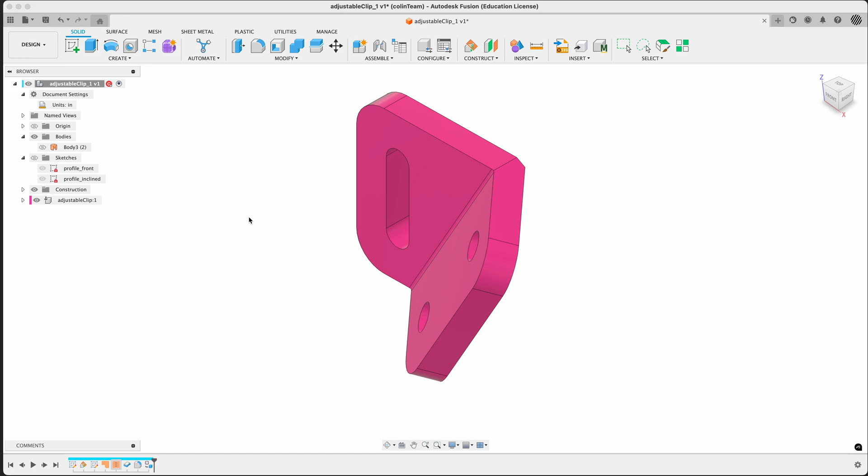So we're going to place some fasteners here. We get a new color, it's kind of a nice fuchsia - it's fine, whatever color you have. If you shift N, you can see what just the steel, standard steel appearance looks like, but for us, color's nice. Notice what it does down in the history - it gives us a new feature, that's quite big. Body to component, obviously.

From here, I'm going to do a couple of things. One, we're going to place some fasteners. Two, we're going to run a mesh, and that'll be the end of our video. Let's do the fasteners first.

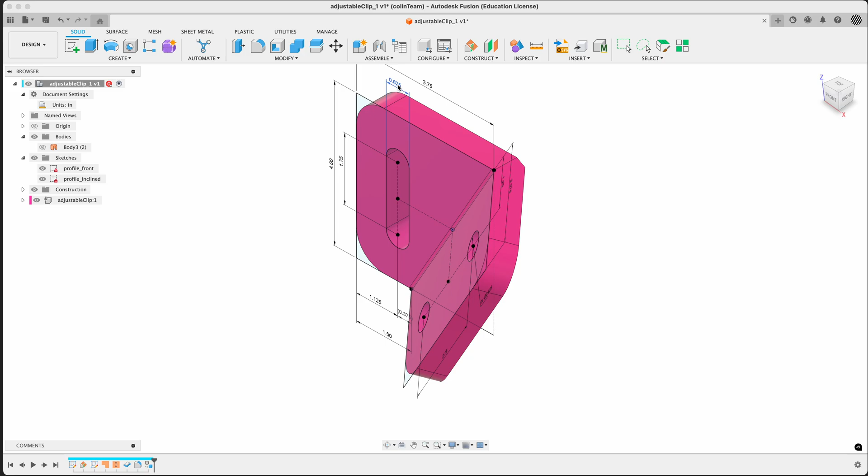We know the answer to this. If we want, we can have a look at the sketch. These holes are driven by this slot in the previous video, 0.625, better known as 5/8. Again, if we want to look at our driving sketch, 5/8, 2 holes.

So that's all fine. Sorry, I'm just going to turn myself to do not disturb - I can hear the phone going.

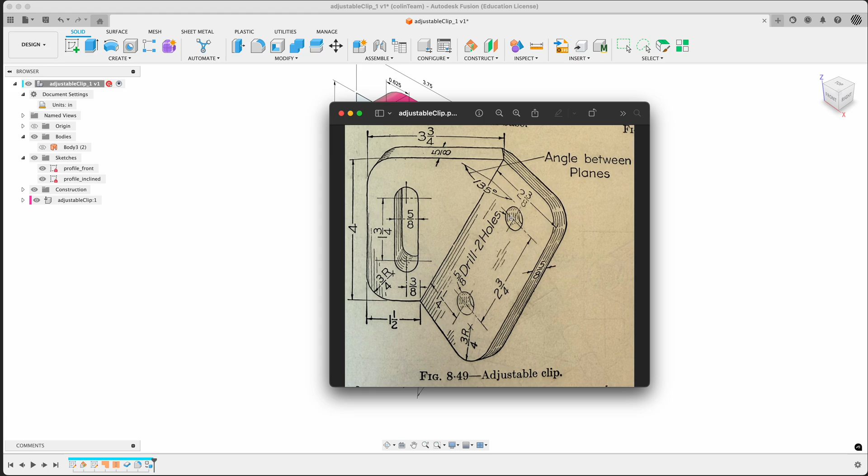So the goal here is to put some fasteners in here. How can we do that? There's two main approaches to this. One is to use McMaster-Carr.

They basically provide a bunch of geometry that matches stuff they can sell to us. The advantage of using McMaster-Carr is that when we place something, we can also get a parts list and actually just get a shopping cart out of it and off we go - it'll be delivered, nice. The disadvantage is they are kind of independent and they're nicely modeled, but they're modeled for appearance mostly, which is great if you're doing renderings and all the rest. But if you want to just run simulations and all the rest, it adds a bunch of geometry we maybe don't need.

The other option for us is to add a fastener - this is part of Fusion. Insert fasteners is a complicated thing, it's newish, but it's surprisingly competent. It's also standards based, so keep that in mind. We're going to do both here, so you get a pass at both.

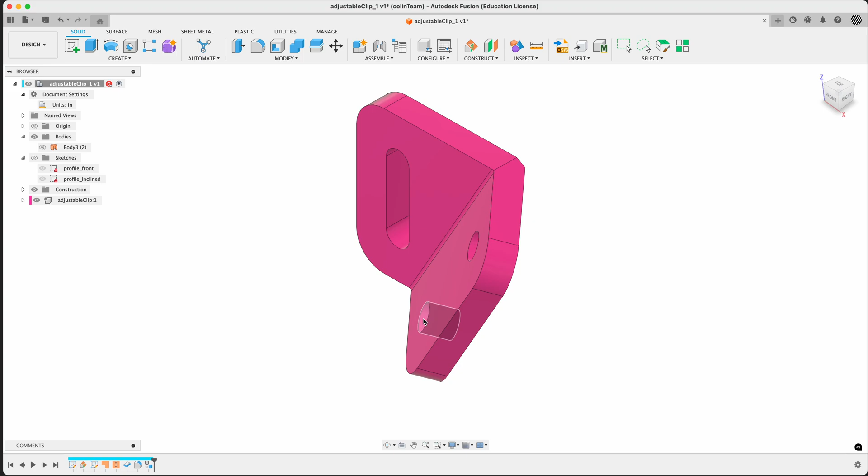Let's put McMaster-Carr into the first hole, and we'll put the fastener from internal fastener into the second hole. Easy - first step, let's try McMaster.

Sorry, if you can't find it, it's under Insert, McMaster-Carr. You get this little, essentially just a web page. You can kind of move it around in the background, but you can't really, for example, do any measuring. So you have to know what you're after, 5/8, and this is 5/8 thick. We're going to put in a washer and a socket head. That's the plan anyway, let's see how that goes.

The washer is the key - the washer goes in first. But because of the way McMaster-Carr works, it just inserts a component. We don't necessarily need to place it in order. The inbuilt fastener stack, in a way, does have to go in order. In a way, it's easier anyway.

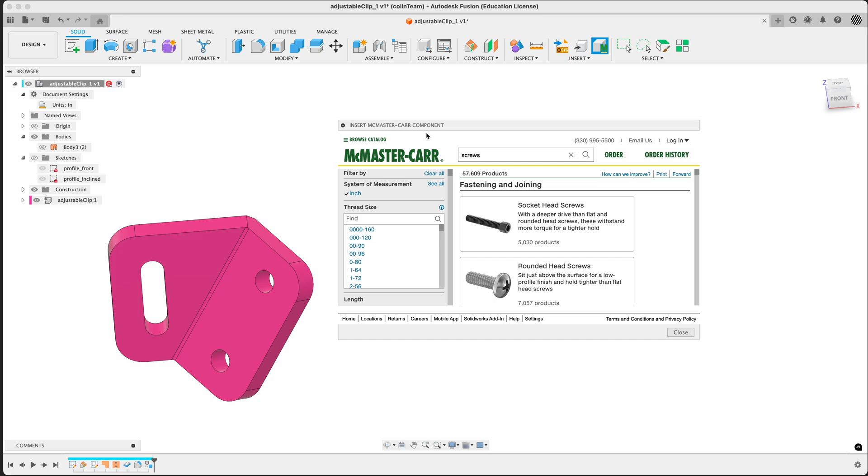Let's put a washer in first - or let's put in the fastener first. Let's do the fastener. I want an inch apart, you can make this a little bigger. I want a socket head.

Now, there's a lot of them. Let's start by trying to filter this a bit. 5/8 is the size we're after. Somewhere in there - no, 5/8 11, 5/8 18.

No, that's a coarse thread - that's the thread essentially, so an inch, it's threads per inch. Or, yeah, let's say threads per inch, and 5/8 18. Let's go for 18.

This is quite a rough part, but we don't know what it's attaching to, so it might be just purposefully flexible for size. Let's go for 5/8 18.

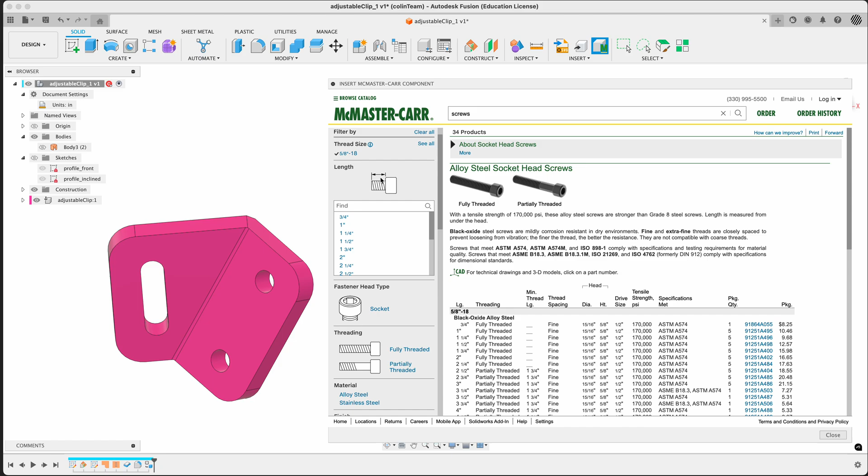This will define everything, more or less everything we do from here. Length - the plate is 5/8 thick, 2 times 5/8, well what's that? 5 divided by 4, all right, 1.25, so that's better known as 1 1/4. So let's make it twice the thickness of the plate. Notice the length is under the head.

Got alloy steel, stainless, that's about it already. It's good. We see the right things here. It's black oxide alloy steel, keep that in mind, and it's 5 for $10 US.

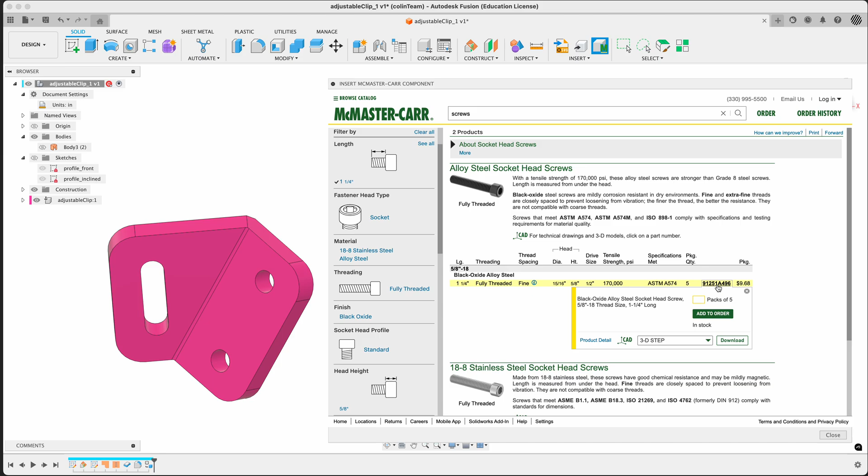Let's have a look. We can see the product detail if you want, that's what it looks like. And I don't want CAD 3D SolidWorks, I want 3D Step. Let's go for threads to make a point. There's a lot of information here, including its strength, its hardness, and specs.

It's from the US, and then a little bit of discussion about it. They're mildly corrosion resistant. So this would be the finer threads are stronger. They're also become a little bit vibration resistant. It meets a whole bunch of standards.

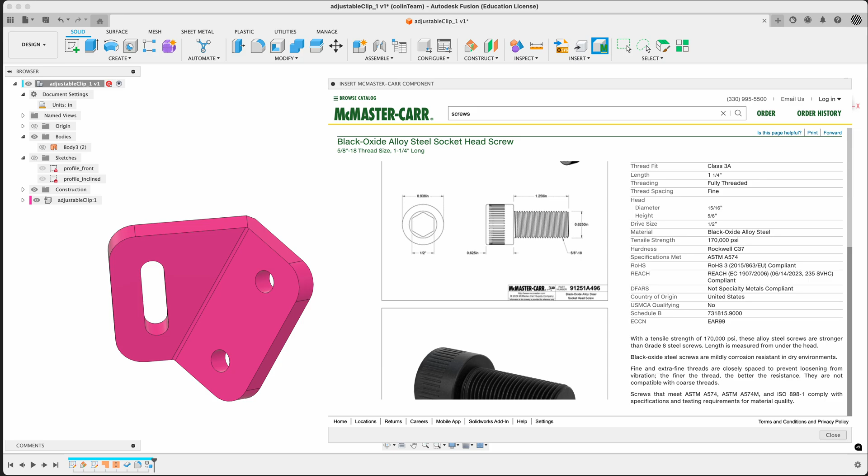So if we wanted, we could, for example, take a screenshot of this, and we could keep an eye on that if we can kind of maybe use it somewhere. So there's our screenshot. So nonetheless, let's download that. This is, we don't have to use the screw to drive all our decisions from here on, but it does help. So as soon as we download this,

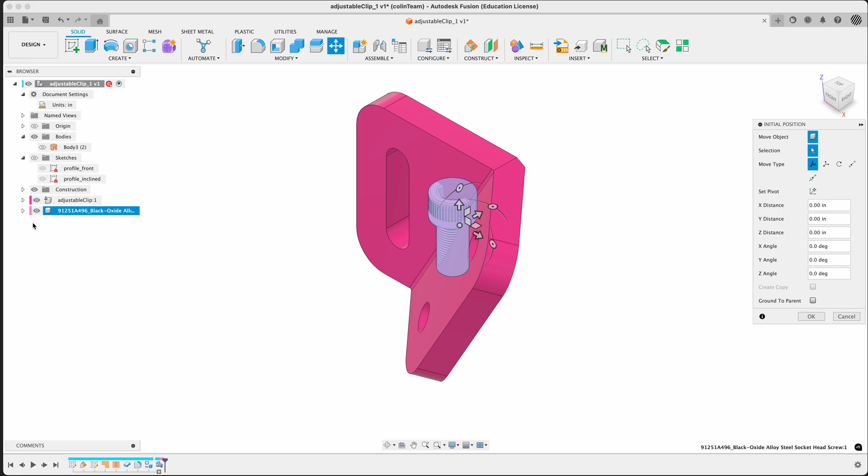basically just plugs it into the file. There it is. Notice there's no lock here, so this is loose. And we'll just leave it where it is right now. It's nice pink. What's the diameter of this?

Let's try a check here. The diameter is just under an inch. So we need a washer that's at least an inch.

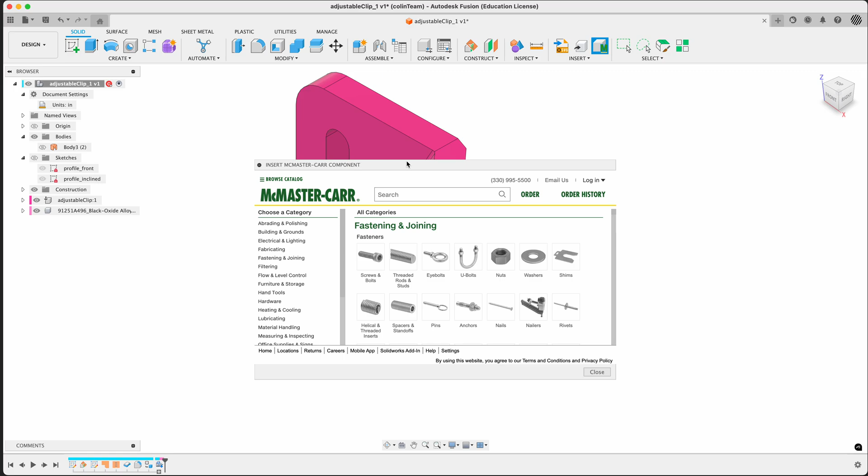Perfect. Let's do McMaster again. So this can be a little tedious because you have to go in and out a lot. Washer. And you do have to keep track of sizes and all the rest. Inch. Screw size is probably what we're after. So the interior hole is driven by just 5/8 this time.

Washers, there's a whole bunch here. Let's just go for washers. General purpose. There's a lot of other things. We had, what did we have? An ASTM.

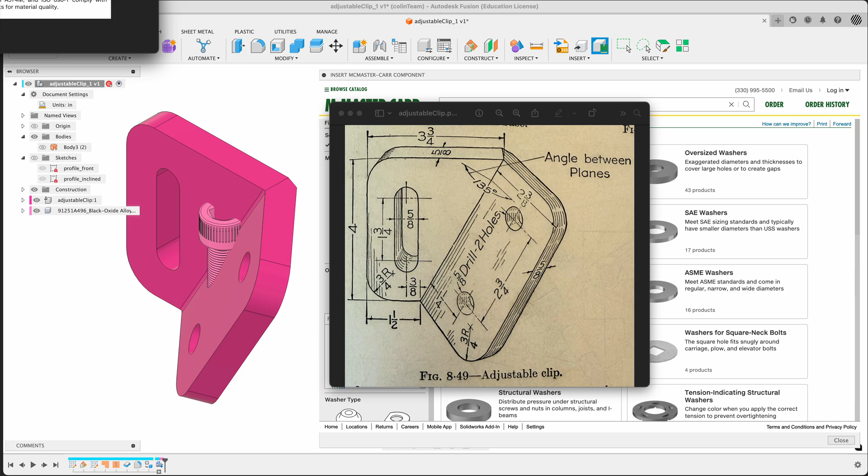Come back here, we had an ASTM standard. Let's see if we can see that here. So this is ASME. General purpose, surely that's not so bad. Let's go for that. Stainless, are you crazy? No, steel, and black oxide, that's what we want.

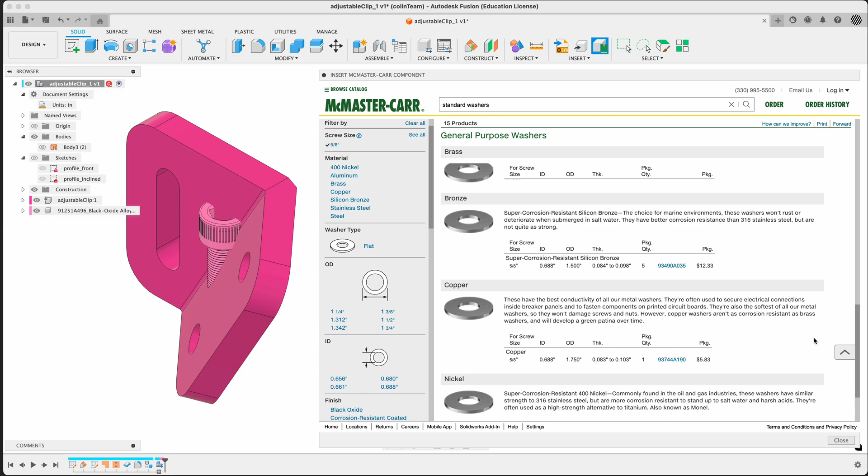And there's one right there. Outside diameter, looks like 1 3/8. 10 for $7. The rest is, no, it's probably what we want. Let's go for this guy. Have a look, product detail.

It's got the same coating which you would like from the fastener, so it's black oxide or parkerized, however you want to see it. It's also American. Standards, where are we here? Well, isn't much. They're saying this is our go-to, so why not?

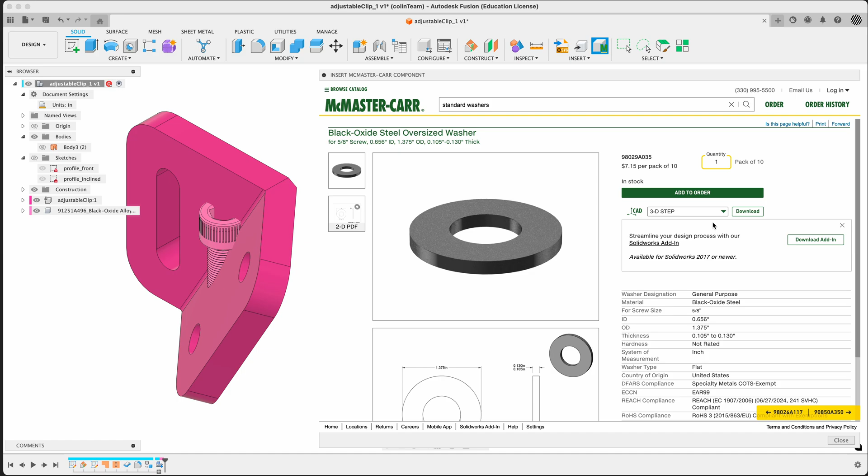It looks about the right size. Let's just download it and see how it goes. Looks okay, now it's obviously not in the right spot.

How do we stick it into place? So normally we're going to be using a joint, the shortcut for that is J. If you want to see it under assembly, joint, J, because these are not as built. We'll come to that later.

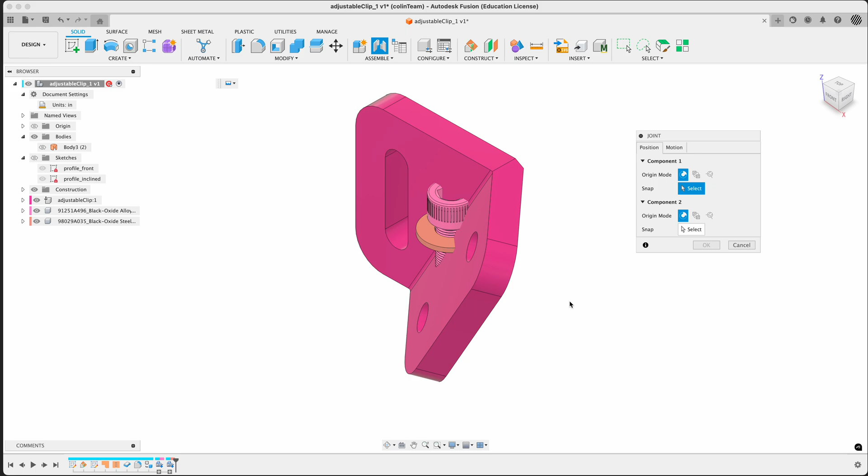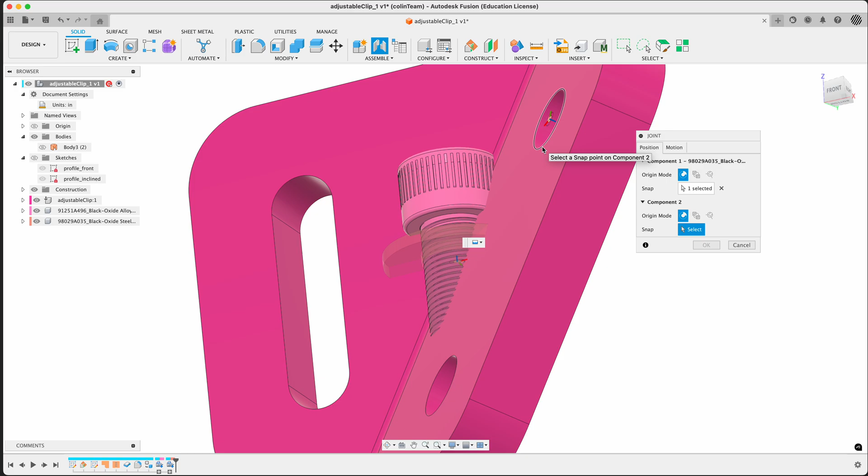So there's an order here, and this is very particular. You pick the uncontrolled, unconstrained parts first. So our adjustable clip is constrained to the universe, it's modeled thus. So now we want to pick our washer first. Now, it doesn't have to be the inside circumference of that hole, but this surface, we can pick anything. It's easy to grab the outside, and therefore easy to grab the outside of this hole in the constrained part, the clip.

If we pick it right, it should just swing on by. Now, type of motion do we want? Rigid? Let's get a preview. Oh, nice. How about revolute? Can't see anything happening, but it is turning. How about something else? Pin slot? There's all sorts of stuff, but is this washer going to move? No, rigid. Okay, do it again.

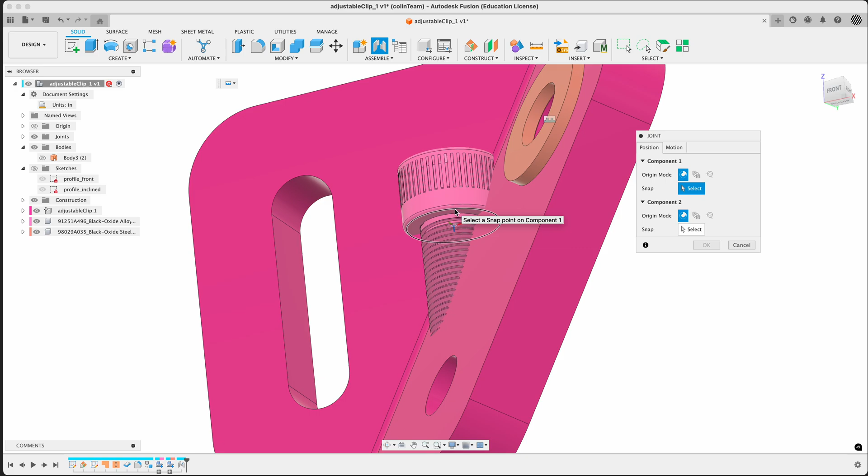Right click, repeat joint. I want this socket head right up against this washer now. This is unconstrained. And I can attach it to either the inside or the outside, the outside's easier to get. Ghost everything out to show us what we're doing. And again, this could be revolute and all the rest, but when you're done, when you pull away the Allen key, it is rigid. So let's just say okay to that.

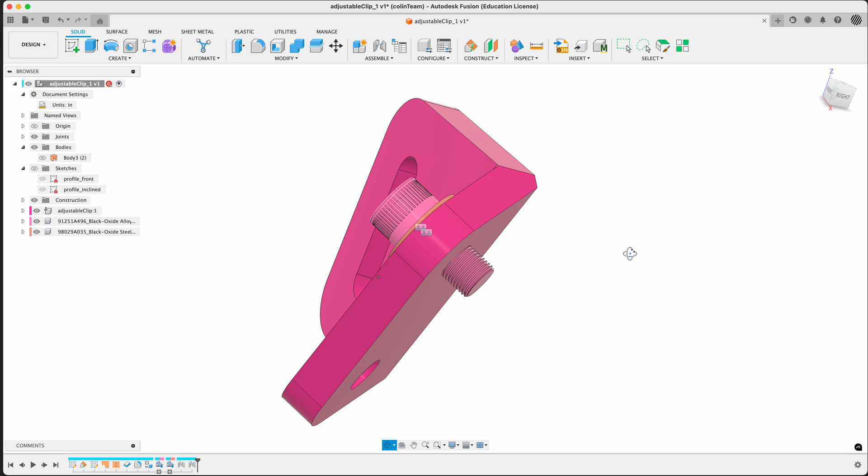Nice, there we go, placed fastener. With standards, like so, there's a standard fit and all the rest. So not bad, let's just leave it at that. We can get into lots and lots of details about fasteners, let's just assume it's okay.

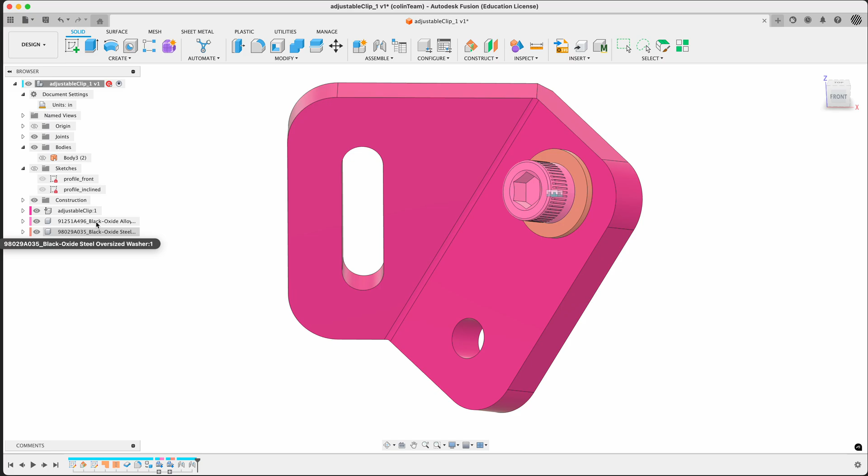For now, because what we want to do is get to the other side. We want to use the other approach inside of Fusion, which is to place by the fastener feature. Now, notice what we've got here, we've got three components now, all within our adjustable clip assembly. It suddenly turned into an assembly. So next, search fastener, or sorry, shortcut fastener, insert fastener.

You get quite a large window. Depends what you did before. So basically, the first thing you check for is standards. I'm after imperial or metric, you can also clear it and get both. We're in an imperial part here. ASME is turned on, you can also ask for ANSI.

But what was our thing before? Let's have a look, ASTM and ISO. That was for the fastener. So we don't have ASTM, but we've got ASME, let's go with that for now.

Just get it up, fasteners, there's other things to place. But what we're really after here is the same order, so let's do washers. You only have to click once, not a double, once. Plain. Now, based on our filters, we've got Imperial and ASME, we only have one choice. Nice, that always makes us happy. And we can see the standard we're going to conform to, B18 22.1 1998.

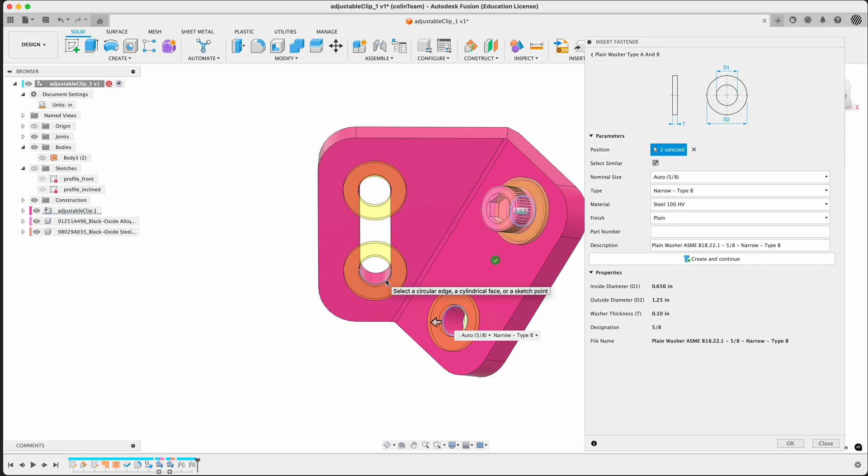Click it once. Can keep placing. Oh, nice. Whoa, look what it does - it looks for all sorts of curves and starts sticking them in. That's not quite what we want, so I don't want lots here. It's hidden, it's adding another one underneath here.

So let's reselect. Notice we've got some options already. Select once. Now I've clicked once, you can see this green check to say finish here. But now if I do it again, it doesn't populate all of them. Now we've got some choices here, and we can see some outside diameters.

We were, I think, 1 3/8 for the other washer. Maybe that's a type A. It's close, close - right, 1.3. But narrow type B, smaller. Narrow regular B, ooh, that's quite big. Wide A, it's thick. Wide B, a monster.

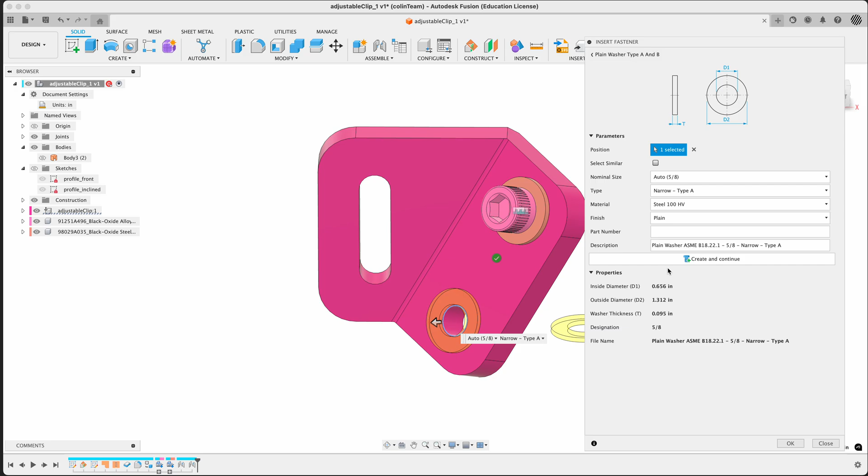So it looks like we're narrow to match what we got from McMaster, and it looks like type B. The diameter is 1 1/4, type A - that's closer to what we've got. So let's go with type A, 0.095 thick. Can't really change that, that's controlled by the standard. Once we're happy with that, let's go for a narrow type A. I'm gonna take a screenshot of this so we don't forget.

We can go ahead and create and continue, which is kind of great. So we're keeping this open, and we're just going to go with create and continue. Makes the washer for us, creates a new part for us as well, inside of fasteners - we'll look at this later.

So just working along, so I want to go back and now do the fastener. So go back, go back - alright, you can always go back in here as well. Bolts and screws. Socket heads - they look a little unsockety, but that's it right there. So it's not countersink for any of these, it's socket head.

Don't want shoulder. Now we're still in ASME Imperial - this is good, right? We want the same standard for the washer and the fastener. It's a hex socket cap screw, ASME B18-3 2000. Now this is similar to the same class of standard, so let's go with that. It's not a spline, it's a hex.

Get a little view of what we're looking at. You can open up the properties - there's a lot more here because there's a lot more geometry.

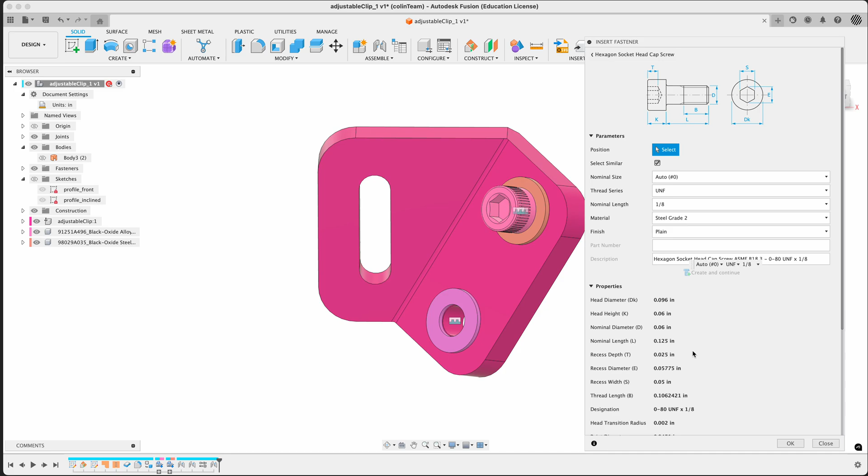Now the problem we have is that our fastener is going to want to sit on top of that washer - how do we size it? Notice our little tiny fastener, that's not the right size. So if we hover over the core of the hole, it thinks, oh, 5/8. But where is it? Now our next hover is on the surface of the washer - we have to click once for that. So notice it's in the right spot.

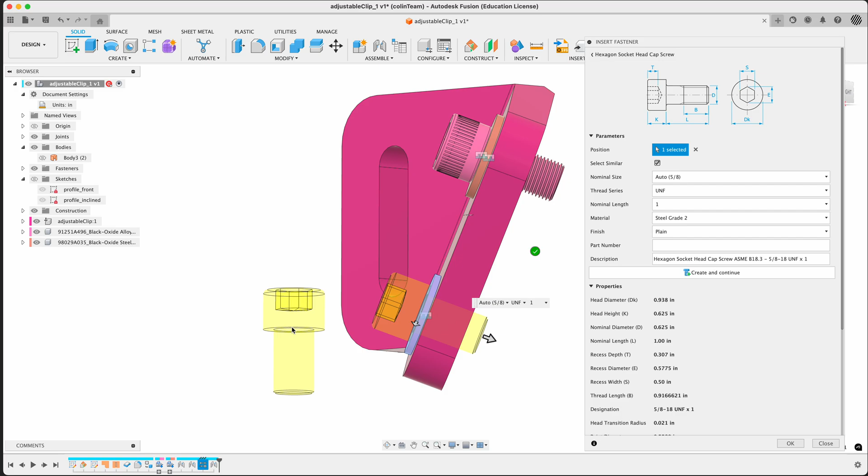What can we change here? Ignore the preview for the next placement. And we can start pulling, and it gives us standard lengths. Notice it's updating to the right there.

So you can either line it up by eye, because we want that 5/8 times 2, better known as 1 1/4, or you can kind of drag and have a look. We're getting a little thing over here. You can see it's also updating our length in the designation - this is kind of great. We can also do these little drop downs here.

Coarse - notice it changing shape. We did a fine on the previous one, so we're not allowed 11. So this is our designation here - we're at a fine, you see an 18. Nice, 1 1/4 long - auto is caused by the size.

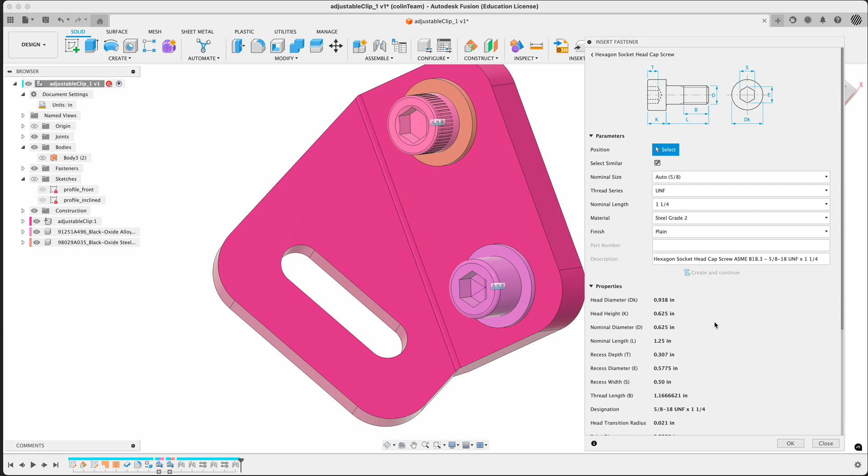Once we're happy, you can either say create and continue if you want to do more stuff, like place more - you can place a whole bunch of fasteners here, different sizes and all the rest. But for us, we can say OK, or create and continue. I find this a little more pleasant - I make sure it's right, and then I say OK.

Oh no, I don't. Now I've screwed up.

So this guy, when I said OK, I made one wherever my cursor was hanging out. We can undo that if we want, so let's do that again.

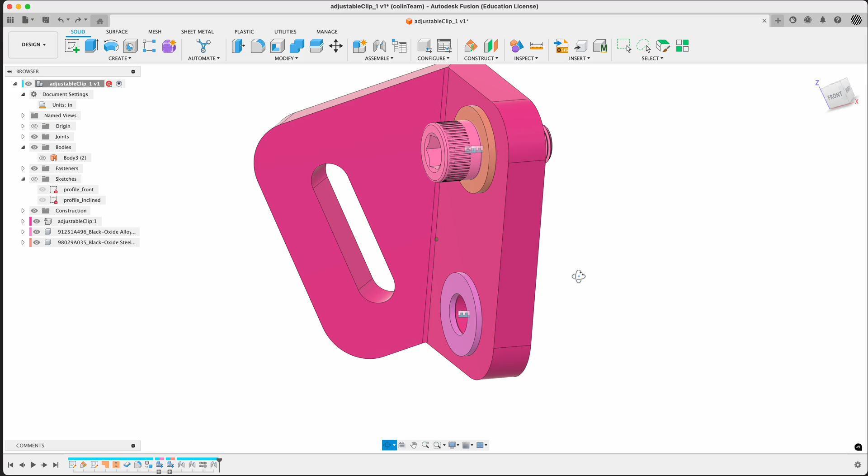Search fastener. It's not a bad thing to do this twice, get a little bit of a feel for this. So bolts and screws, we've done this once, we can do it again. Socket head cap screw, pick the surface.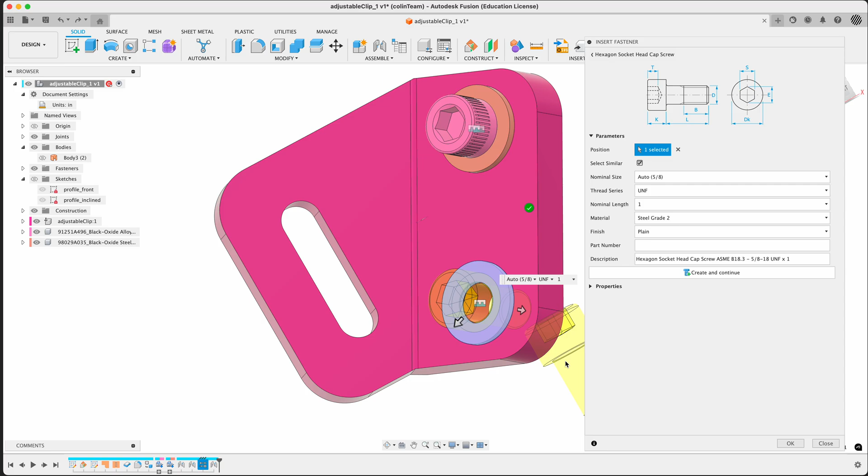It kind of remembers where we just picked. Again, this is our interface, our little micro menu, marking menu. Make sure it's fine, 1 1/4 long, and we can say OK.

There it is, so it's good to try this multiple times. These are all locked, you can notice we get a locked assembly. So inside of fasteners, you can see them here now. They're placed, not really placed as components, but placed as a sort of separate component fastener thing.

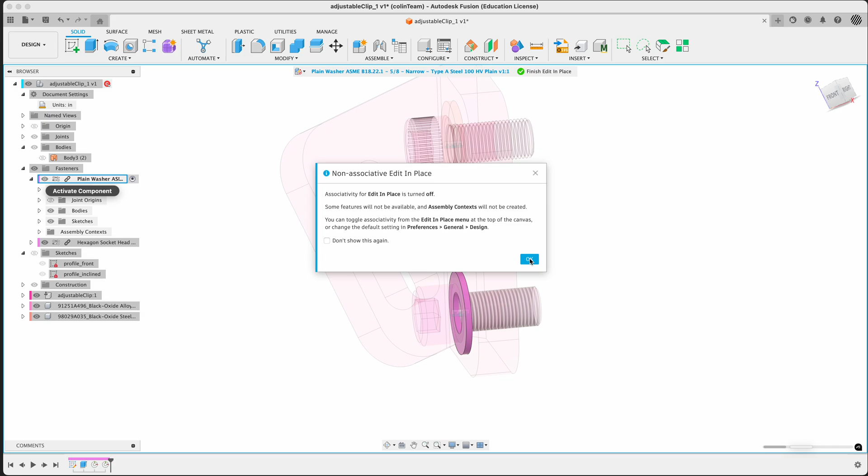If you edit these, you of course get the same sort of stuff going on. This is an edit in place. Well, let's not get into this later.

Notice the history gets a little serious here. One thing you can do, these are our joints for the placed McMaster parts, these are our fasteners. If you wish, you can create a group here and call it place fasteners or something, but for us it's fine, leave it as is.

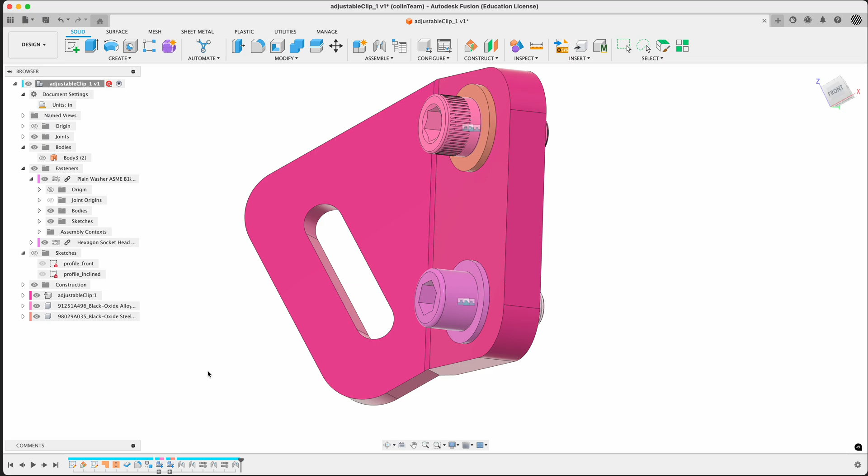Now, done some good work here. That's one thing we would like to know, so for example say volume. Right click on top, and you want not property, not physical material, but properties. Manage, there's a whole bunch of stuff going on in there, but let's go for volume.

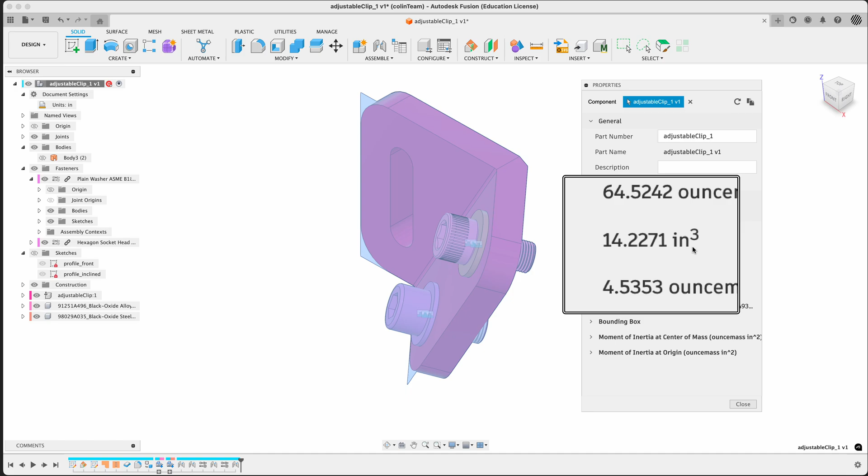14.2271, that's what I want. This is painful because there's threads in here, little detailing, there's detailing in this McMaster-Carr part. But to make sure that you've done the same thing I have, this is the number we're after.

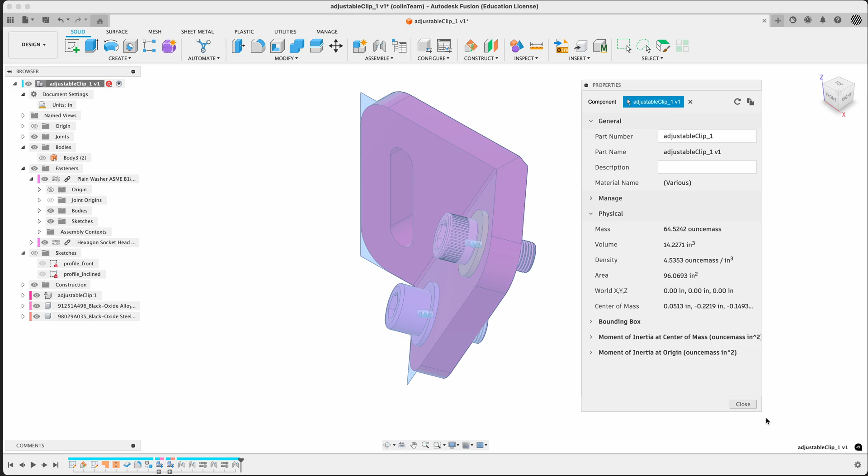I'll take a shot of that as well, pressing the wrong buttons. I'll take a screenshot of that, show all the parts. Everybody's happy.

Next, and last, go over to sim. Run a static stress, it's fine, we're only going to do a mesh here. Look at all that stuff.

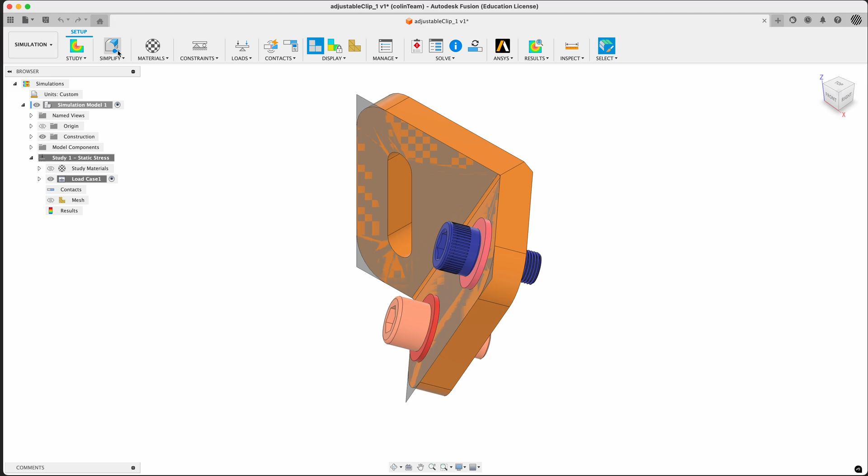Oh no, what I want to do is simplify this big time, I don't want to mesh any of this stuff, it's insane. So go into simplify. One thing we can do is right click on one body that we're interested in, in this case the adjustable clip itself, remove all except selected. Nice.

Let's see what's in here. There, just that body is there. Anything else? Seems to be it, it's perfect. So simplify, remove everything. Now this is only for the simulation, if we go back to design, it's all still there. It's just simulation, so inside the simulation model itself.

Run mesh by just turning it on. It's not bad, this is a simple part right? It's crazy rough, but this is a problem, we'd like more density here.

So what I'd like you to do is just follow along with what I do here to make a point. Again, we're using the mesh control. Go to, I would say, let's go to about 5%, should be right in the middle of course, 5% of the model, which will give us a denser mesh.

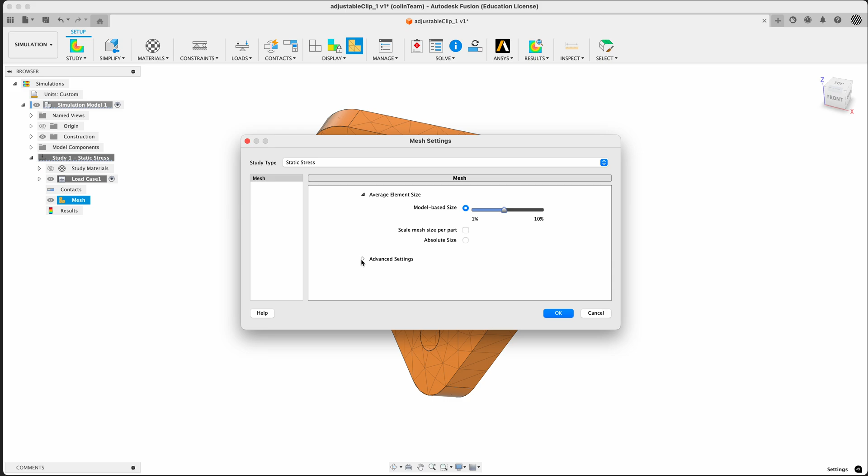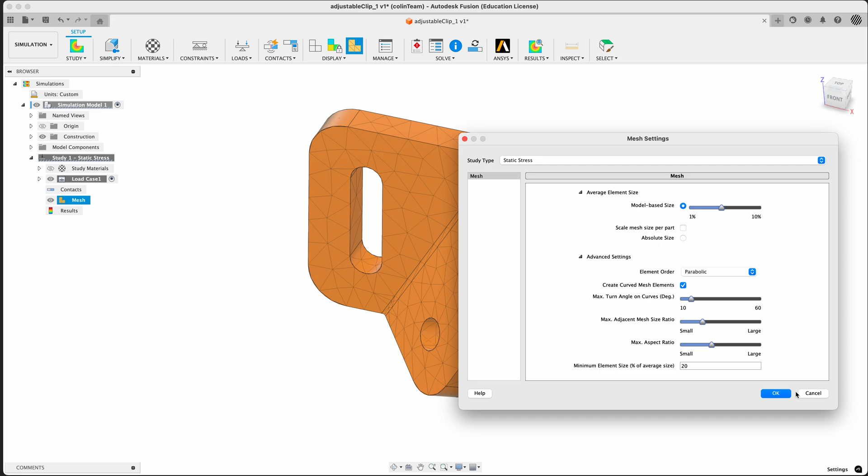And then I'm going to go, I want to catch this fillet quite nicely, so I'm going to go to about, say, 15. Leave everything else at the default ratios. So you have 15 degrees there, 5% up there. Say OK, run the mesh again.

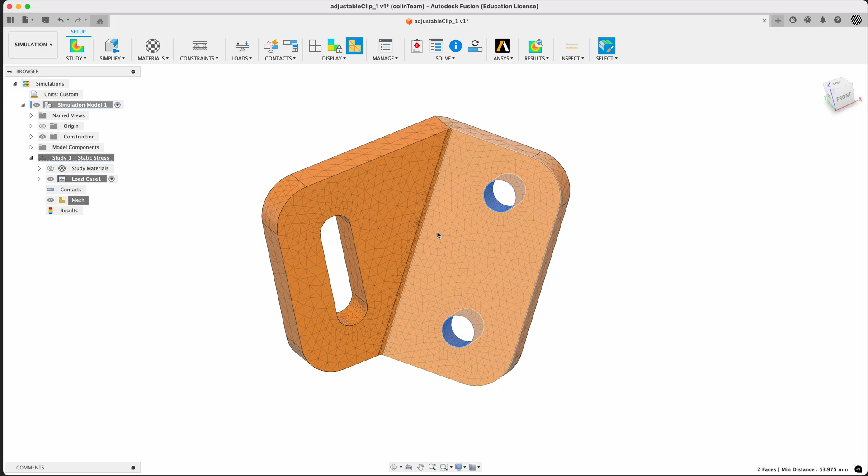It's quite dense, but we have a simple part, this would run not too bad. These fillets are not ultra stressed. We know flow lines, flow lines are going to be mostly concerned by moving from these two guys over to this slot, so it's going to flow through the part. It's going to be really concerned with this fillet in the middle here, not so much at the back.

It's going to probably pull away as it flows through that corner, but it will be interesting to see if we were to run a simulation, which we're not, what is the density, well like what's the sort of KT running inside of here?

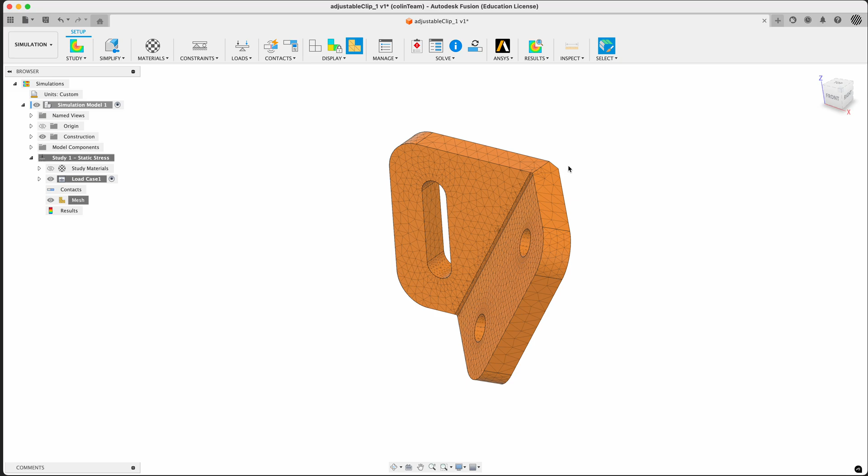The question that we were probably going to be asking here is what size fillet do we want in here? If this part was made by bending a piece, what break radius is it going to be using? Or if it's cast, how are we going to be modeling or making the casting blanks or molds for this guy? That's it for now though.

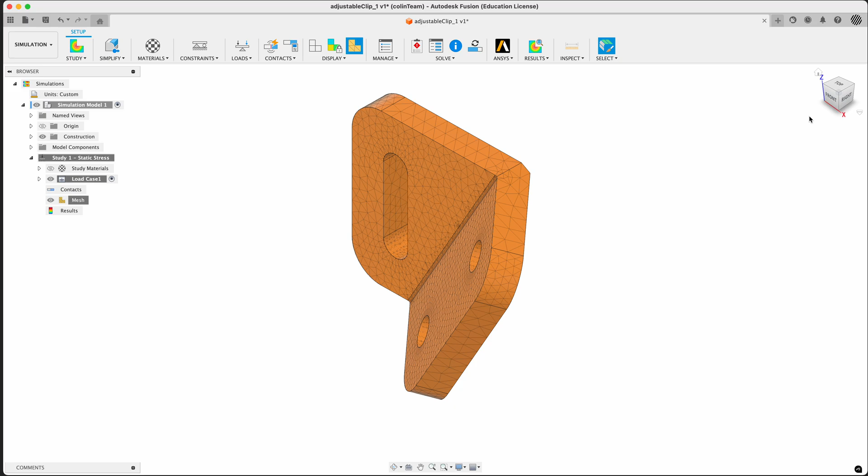Take a screenshot of something that looks good, try and show me this, and maybe at the same time show me the settings that you've got. Oh, can't move that, move it into the right spot first. So give me a mesh preview with everything showing and the mesh correctly generated, show me this as well.